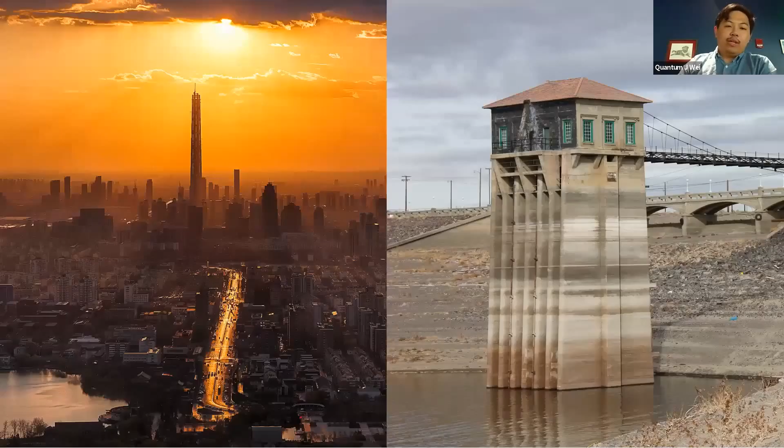But first, why do we care about desalination? Well, by 2050, it's projected that 6 billion people will face freshwater scarcity problems. This is due to 2 reasons. One, as populations grow larger and wealthier, they consume more and more water, so there's a growing demand. At the same time, due to the effects of climate change, rainfall patterns are becoming more extreme and more uncertain. So the supply is becoming more unreliable, and you can expect to see more and more dry reservoirs like this one, more and more drought.

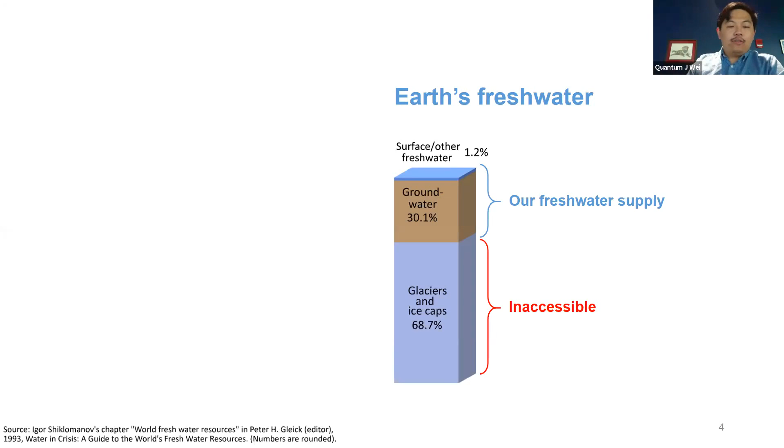This is the Earth's fresh water. Two-thirds of it is frozen in the ice caps, so it's not really accessible to us. The remaining third is our fresh water supply, and pretty much all of our drinking water comes from that third. That fresh water supply gets replenished through rainfall, the hydrological cycle. All of this fresh water compared to the Earth's water overall is very small, a little less than 3%.

As we're seeing more and more places seeing less rain, more drought, what can they do to expand their water supply? Well, the reason I think desalination is going to be more important in the future is because desalination allows us to tap into the ocean and expand our fresh water supply.

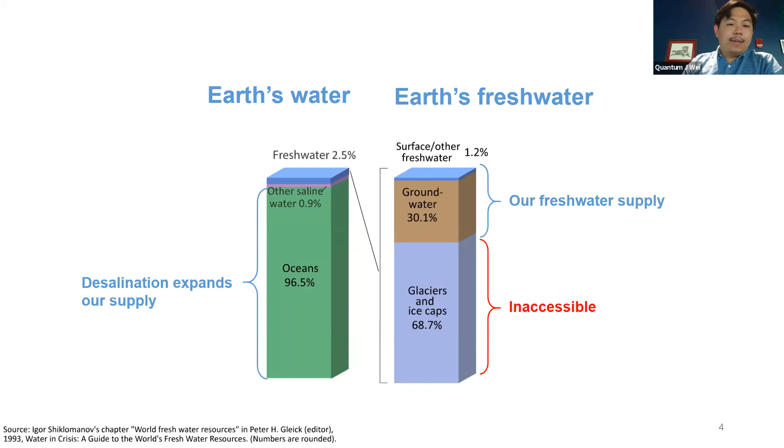I'm not saying that it's going to be the tool everywhere. It's not going to be a silver bullet, but when it doesn't rain, we can desalinate. And where it makes sense, we should use this tool.

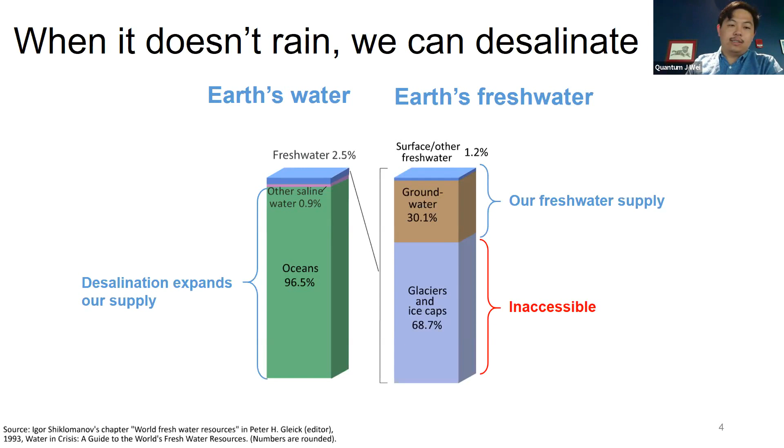The state-of-the-art method for desalination is reverse osmosis, or RO. 50 years ago, the dominant methods were thermal desalination technologies, basically evaporating water. But reverse osmosis has gotten a lot better and a lot cheaper over the decades, and is now the dominant desalination technology.

So what are researchers looking at to improve this technology? Well, the first is energy consumption. If you look at seawater RO, it requires really high pressures. It varies by plant, but roughly speaking, a third of the cost of seawater RO is attributed to the energy cost.

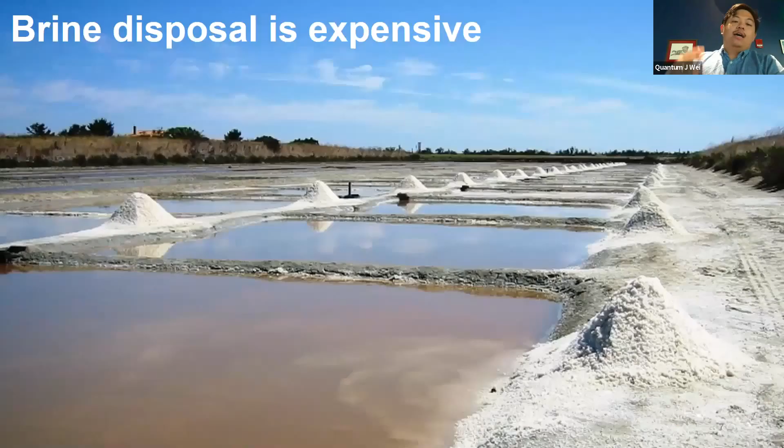In brackish water desalination, brine disposal is the main concern. These desalination plants are usually located inland, far away from the coast. They're desalinating brackish groundwater, and those plants produce a brine that they have to figure out some way to manage. One way you can do it is with evaporation ponds.

So dig a big hole, dump that brine in, and wait for it to evaporate. Another method is deep injection wells — dig a really deep hole and put that water into the ground.

These methods are really expensive compared to reverse osmosis. So if you were able to, people would much prefer to run RO at higher recovery and recover more water, produce less brine, and avoid digging these evaporation ponds.

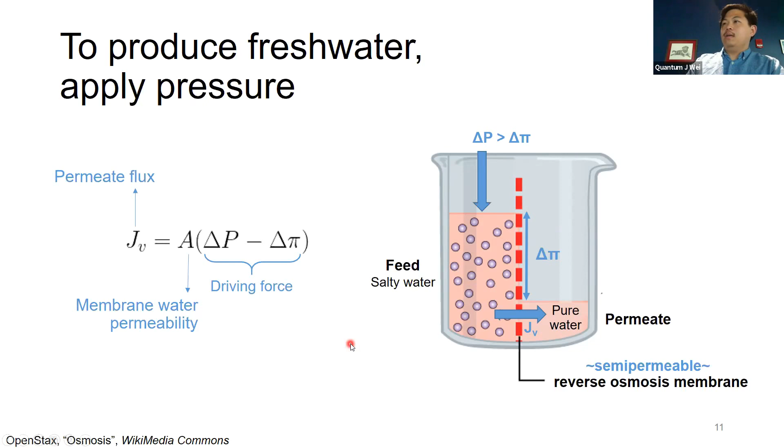Now, as we move along the membrane module, delta P is greater than delta pi, so permeate is always being produced and is permeating through that membrane. As that happens, the feed gradually gets more and more concentrated, and we end up with a brine solution that continuously flows out of the system.

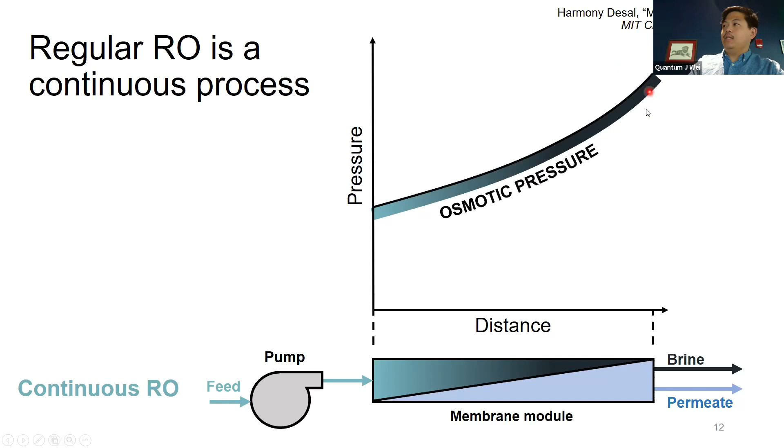You can see here the osmotic pressure starts out low as that feed enters. As the feed gets more and more concentrated, the osmotic pressure rises. And the way these things work, the pressure that this pump applies, that continuous RO pressure, must be greater than the osmotic pressure at the end of the system. So that's what it looks like there.

And the problem here is continuous RO wastes a lot of energy because of this configuration. You can see the difference between the pressure and the osmotic pressure is very small at the end of the system, but at the front of the system it's very large. The system's over-pressurized, so it's actually wasting a lot of energy that could be used more efficiently.

So that's the whole idea behind batch RO, to try to recover some of this wasted energy. And the way we do that is we don't mess around with the membranes. We're not material scientists, but we're really process engineers, so we design the process. What we do is we turn this process from a continuous one into a batch process.

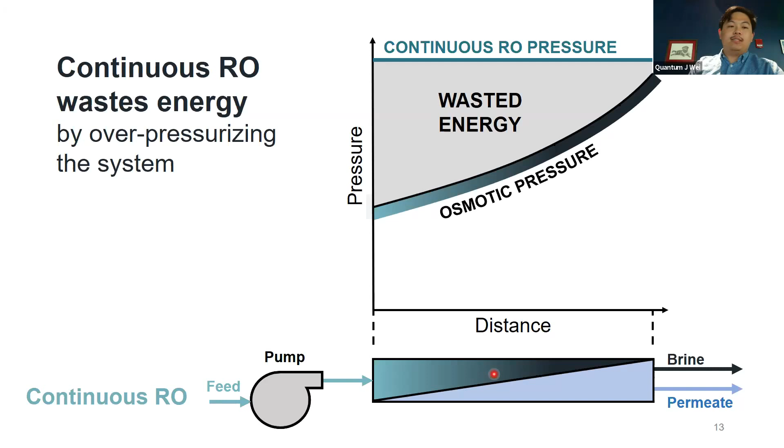This is what it looks like here. Instead of having water flow continuously in and continuously out, we're taking a fixed volume of water, and that brine that flows out, we actually recirculate. What that allows us, or what that changes, is the osmotic pressure is still increasing over the course of our process, but now it's increasing over time instead of across the distance of the membrane module.

Since the osmotic pressure is varying over time, with this pump, we can also vary the pressure over time, in order to track the osmotic pressure, just like that. And what this gets us is a big energy saving. In fact, batch RO is the most energy efficient RO process possible in theory.

So this idea has been around for a while, but there's been a lot more work on it recently, over the past 8 years or so.

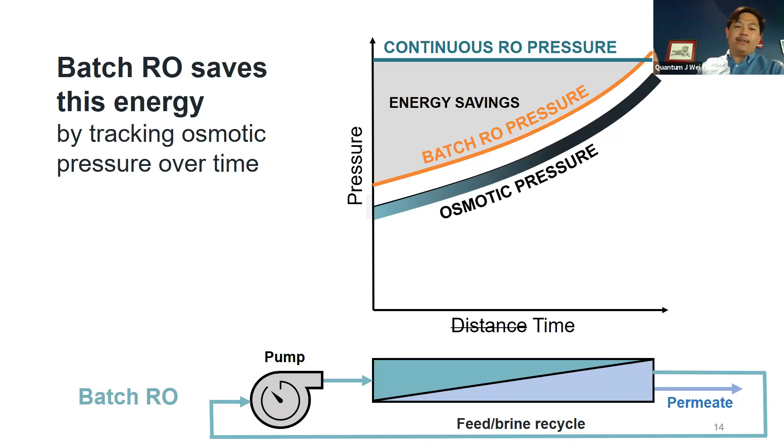The reason for that is there were lower hanging fruit before this process redesign. Improving the pumps, membranes, and energy recovery devices got you a lot of energy savings, and you didn't have to worry about reconfiguring the whole process.

But now people are looking at batch RO. First, researchers in our group and other groups wrote energy models to predict the energy consumption of batch RO. They found that batch RO is the most energy efficient RO process, more efficient than two-stage RO, more efficient than semi-batch or closed circuit RO.

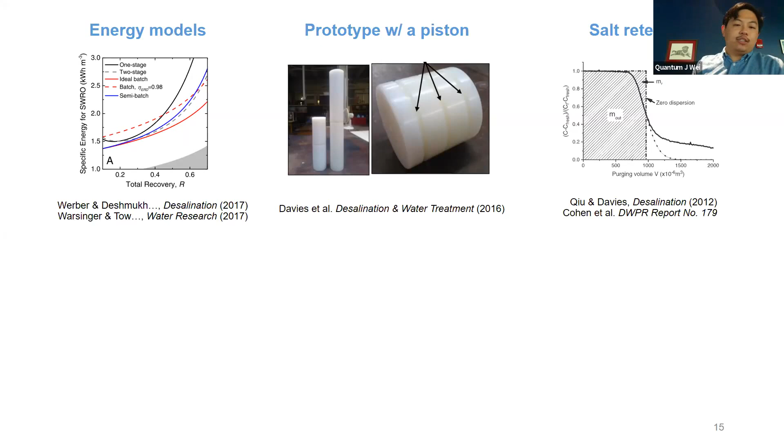This research group in the UK built the first batch RO prototype, using a piston for their design. The same group looked at salt retention in batch RO — we'll talk a lot about this later.

Jay from our group looked at the optimal design of batch RO systems, varying reset times and per pass recoveries. David, Emily, and others in our group looked at the scaling resistance in batch RO — the idea that by rapidly cycling salinity, batch RO is resistant to scaling, so we can operate at higher recoveries than regular RO.

Finally, more recently, groups have thought about new designs for batch RO. This one here is a hybrid semi-batch batch RO system that reduces the footprint of batch RO systems at high recoveries.

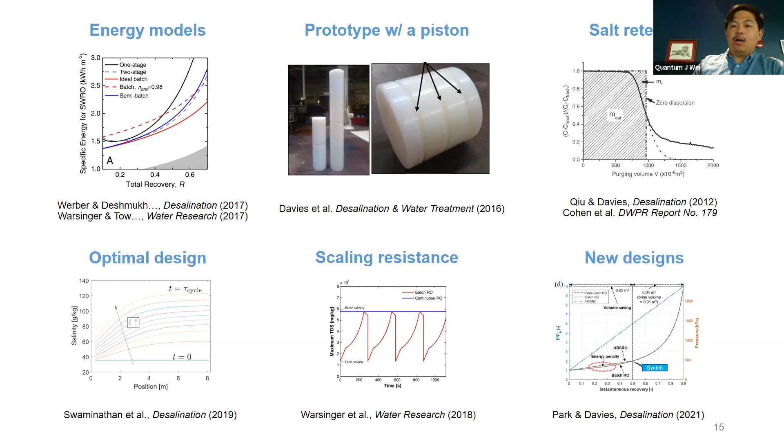So when I first started working on this four years ago, what was sort of missing was that students in our group had invented a new batch RO design. Here there is a bladder.

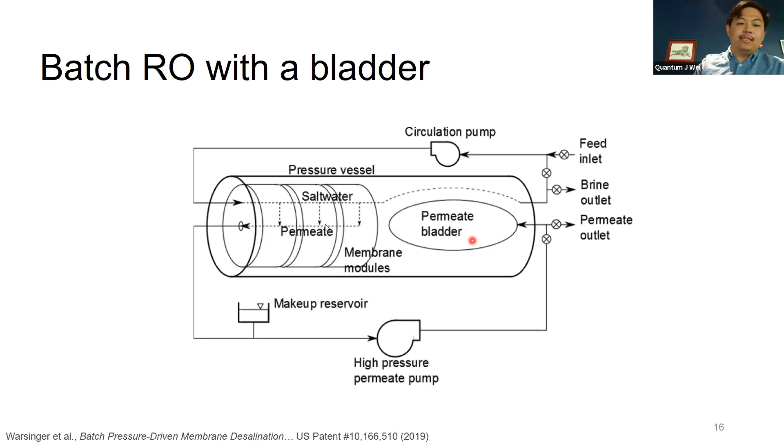That bladder basically replaces the piston we saw in the earlier slide. The thinking was that this design is more advantageous because with the bladder, it's probably easier to manufacture and there's less chance of leaking. With the piston, that piston moves back and forth during the batch RO cycle, whereas this bladder is freestanding and not touching any of the walls of the pressure vessel — maybe it's just easier not to have to deal with that at all.

So this is what we thought — to build that batch RO system with a bladder — and this is what that system looks like. You've got the bladder sitting in a pressure vessel, our RO membrane, a high pressure pump, and our circulation pump.

When we want to produce permeate water, we take a makeup fluid and pump it through that high pressure pump and into the bladder. That bladder wants to grow, but one thing to take note of is that water is incompressible.

What that means is if you're pumping water into a tank that's filled with water, the pressure is going to rapidly increase. If you continue pumping water into that full container, either the pump's going to break or the tank is going to break.

Or in our case, we have a safety pressure release valve in the form of the RO membrane. Because once the pressure in the pressure vessel exceeds the osmotic pressure of the feed fluid in the pressure vessel, permeate is going to leave through the RO membrane.

So in this manner, permeate is produced at the same rate that makeup fluid is entering our high pressure pump. Throughout, this circulation pump is circulating water around the system to keep the feed well mixed and to provide a cross flow against the RO membrane to reduce concentration polarization.

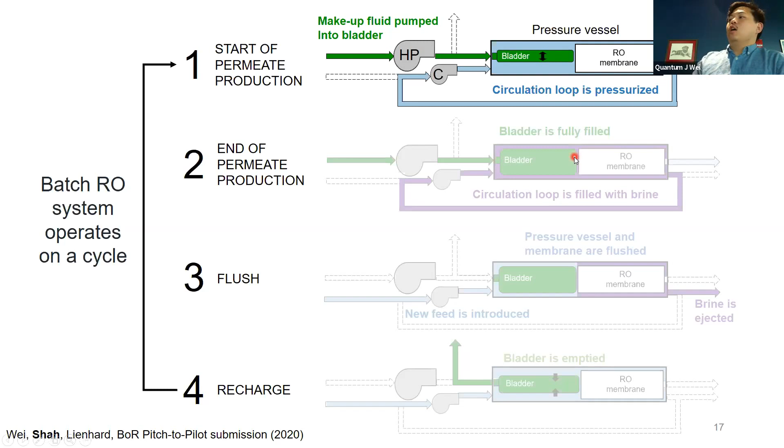We continue producing permeate water until the bladder is fully filled up. That circulation loop now has much less water, but basically all of the salt, since the salt can't pass through the RO membrane. So if we want to continue producing permeate, we can't do it like this.

What we have to do is reset the system, starting by flushing it. We open and close some valves, and the circulation pump brings in new feed and ejects the brine. We do that until all the brine has exited the system.

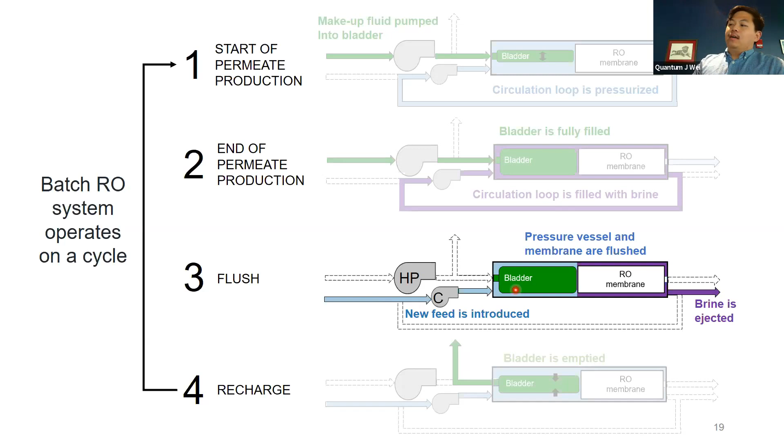Next, we need to recharge the system. We open and close some more valves. The circulation pump continues to bring in more feed, and now it's emptying the bladder. Once that bladder is completely empty and the pressure vessel is filled with feed, we can go back to the permeate production phase and do it all over again.

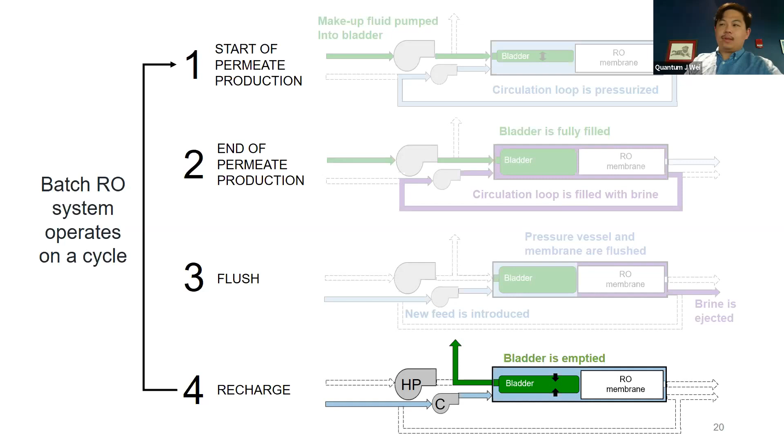Now we've got the system up and running, and really the importance of this is the first batch RO system with a bladder that has been built and operated. As far as I know, the only one.

What's important here is the bladder. This is a new component that RO systems don't currently use. So people are rightly concerned about the reliability of this bladder. This bladder is growing and shrinking throughout each cycle. Can it do that reliably for thousands, tens of thousands, hundreds of thousands of cycles? If that bladder isn't able to do that, then the design isn't going to work.

Well, our bladder is able to function. We've got it functioning for hundreds of cycles without failure. We haven't been able to do longer-term testing, but I think we've shown that this design can work and merits further exploration. The second thing we did with this prototype was validate energy models.

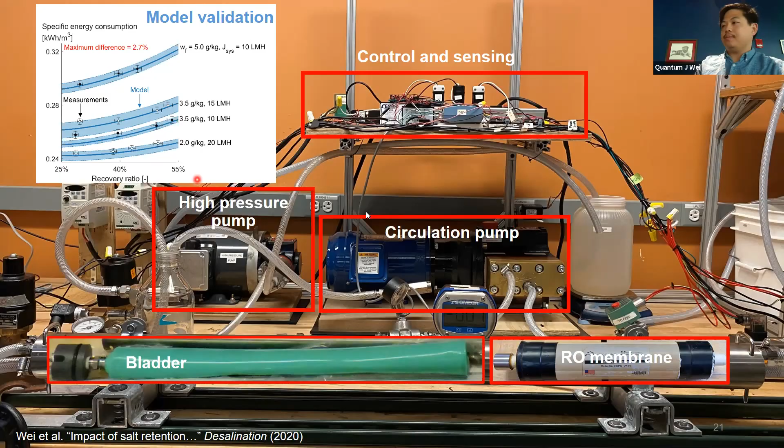So we've demonstrated batch RO, we've validated energy models, so we're thinking we've got the most energy efficient RO process, so we're good to go. But with any new technology, things don't work out the way in real life that you maybe expect on paper. Usually you'll have practical losses or parasitic losses that come up. Maybe you didn't expect them before, or maybe you just aren't able to measure how much they affect your performance without actually building and operating the prototype. So that's what we did next with the prototype: took a look at these practical losses, and after quantifying them, came back and revisited to see really how much energy batch RO is going to save.

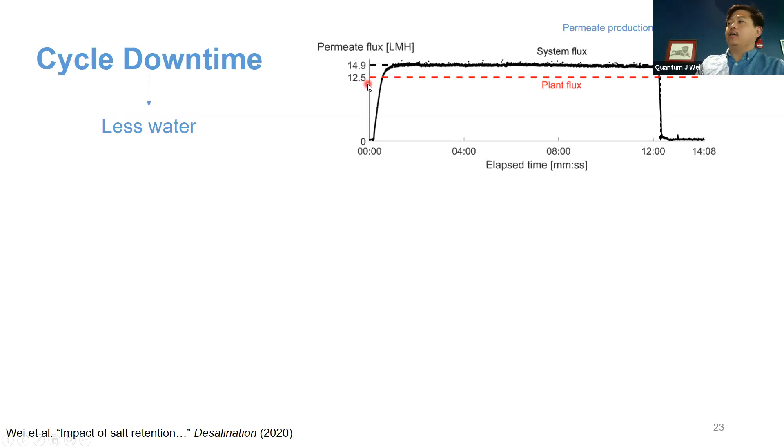The first practical loss is cycle downtime. Here we've got permeate flux. These are experimental measurements over time throughout the batch cycle. During the permeate production phase, we're producing water, but then during the flushing and the recharge phases, we're not producing water. That's the practical loss. If you take an average over the entire cycle, your flux is lower than your operating flux during the permeate production phase.

A quick word on units. Permeate flux is defined as the permeate flow rate per unit membrane area. The units are liters per hour per meter squared. The desalination industry has developed this shorthand, LMH, which basically means these units. So 15 LMH means that you're producing 15 liters per hour of fresh water per square meter of membrane area.

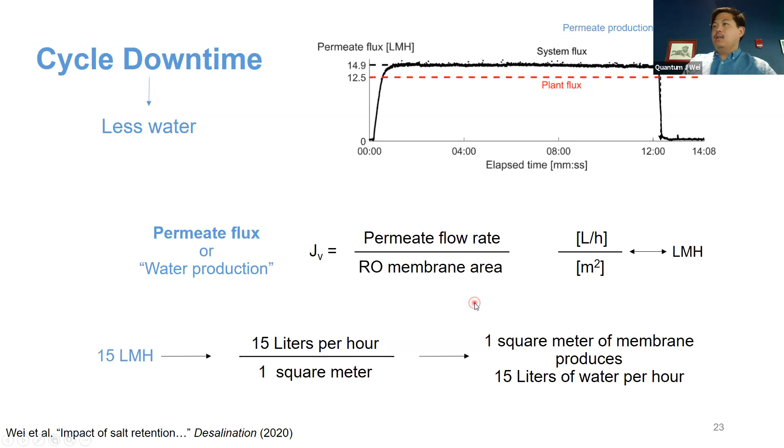Why do we care about the feed salinity? Well, this feed, 35 grams per kilogram, that's typical for seawater. That means you have 35 grams of salt per kilogram of seawater. Remember, feed salinity determines osmotic pressure, so the osmotic pressure of the feed is going to be 28 bar, or 28 atmospheres. And if you increase the feed salinity, you're going to have a higher osmotic pressure, like that brine. So if we get a saltier feed in our system, that's going to push the pressures up, and that's going to push the energy consumption up.

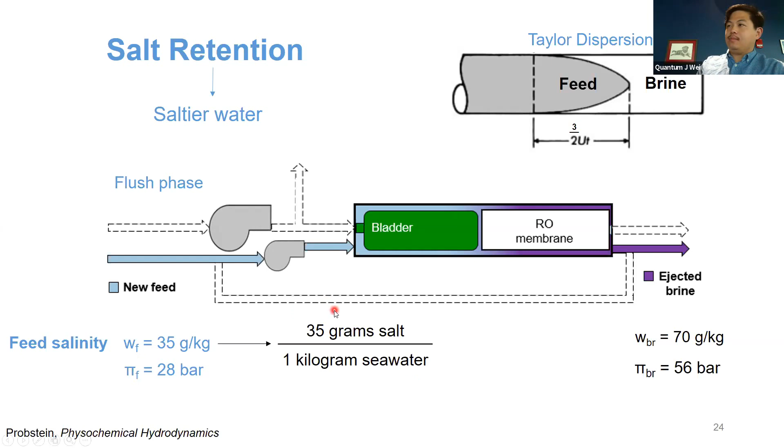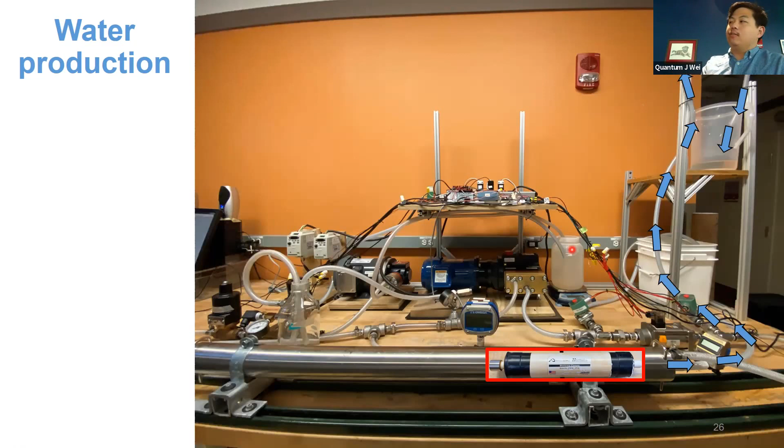Now we noticed whenever we stopped the permeate production phase and went to the flush phase, water would start going down, and it would start from the apex and start to travel down this tube. And if you let it go long enough, sometimes it would actually re-enter the pressure vessel and bring air bubbles into that membrane. So that's the reason we brought this tube all the way up there. We wanted to give the permeate more length to prevent that from happening.

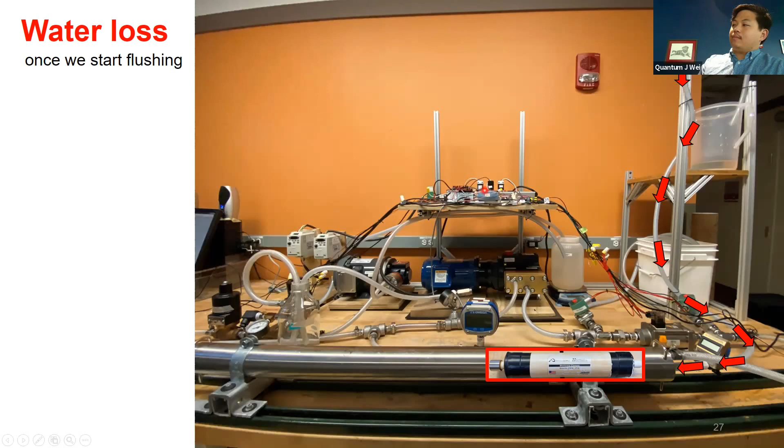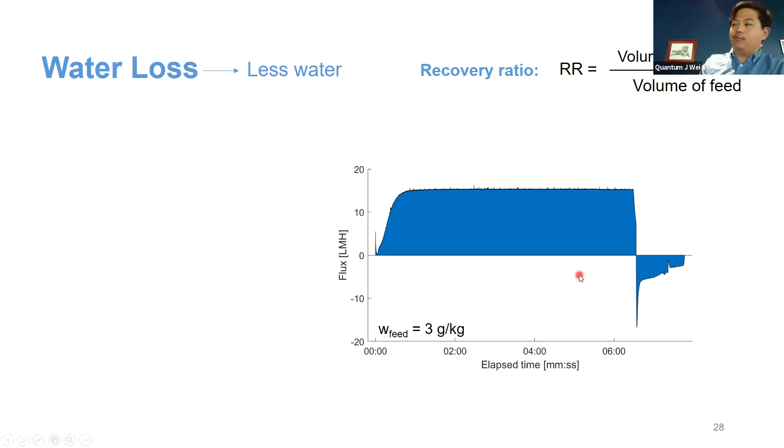The way we measured this is with two flow meters back to back, one flow meter to measure the permeate production and the other flow meter to measure the water loss. The recovery ratio during permeate production was 50%, but we lost 2% of the water during the flush and the recharge phases. So the effective recovery ratio is only 48%.

Remember, the reason this is happening is because of that egg yolk. We're releasing the pressure in that system, so the driving force flips, and we get osmosis, a natural tendency for water to travel back into a salty solution.

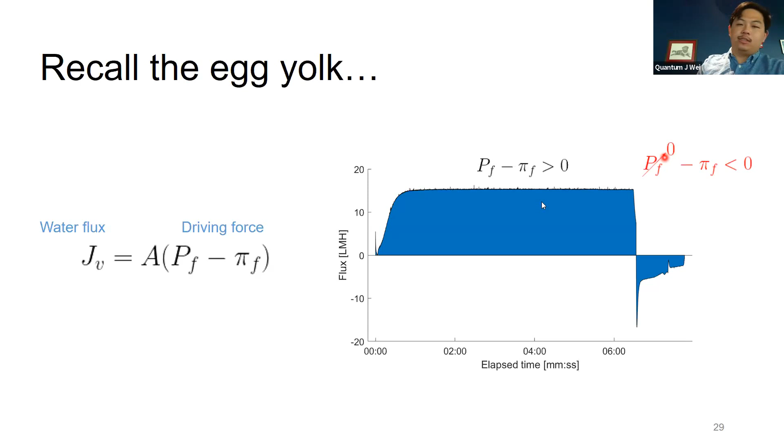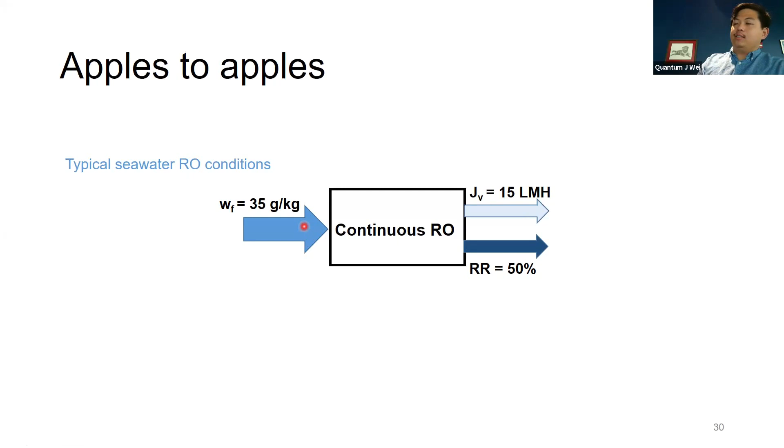So why do we care about these practical losses? When we're thinking about comparing batch RO to continuous RO, we want to make sure that we're making a fair comparison, apples to apples. So these are the typical seawater conditions of a continuous RO plant. The energy consumption is 2.2 kilowatt hours per meter cubed, so 2.2 kilowatt hours of energy per meter cubed of permeate.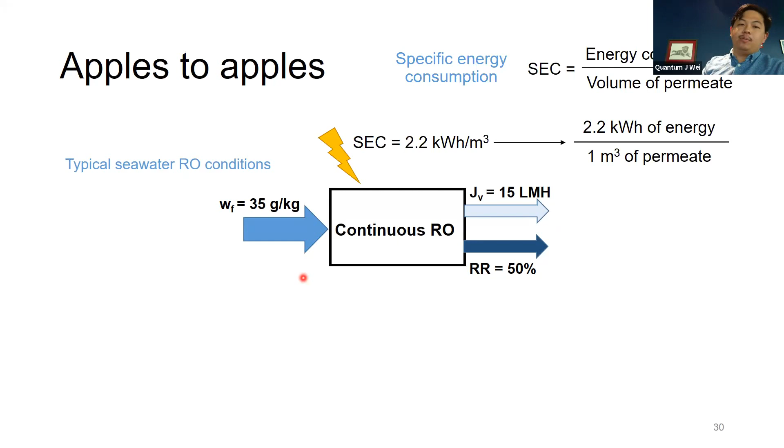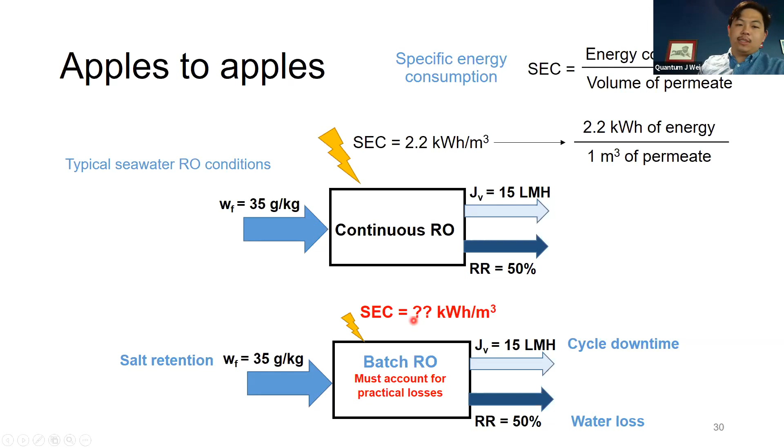If we've got a batch RO system, and we're comparing it to the continuous RO system, we want to make sure that the same water is coming into the system and we're producing the same water out. We want all of these parameters to be the same. But because of these losses, the batch RO system is going to see a different feed salinity or operate at a higher flux or a higher recovery ratio. So we need to account for these losses in order to calculate that energy consumption with our energy models and then compare it to continuous RO.

So for the cycle downtime, it's easy to calculate. It's just a proportion of the downtime to the cycle time. So the batch RO system will operate at a flux of 19 LMH in this example.

With salt retention, we know the feed salinity is going to be greater. The question is how much greater. So we took the prototype and we measured the feed salinity elevation. What we did is we ran the batch RO system for multiple cycles using the same parameters, and we measured the feed salinity between each cycle. The feed salinity started out low, maybe at 2 grams per kilogram, and with each cycle, it started to increase. But then eventually it reached a steady state. And once it reached that steady state feed salinity, we recorded that value and then moved on to the next measurement.

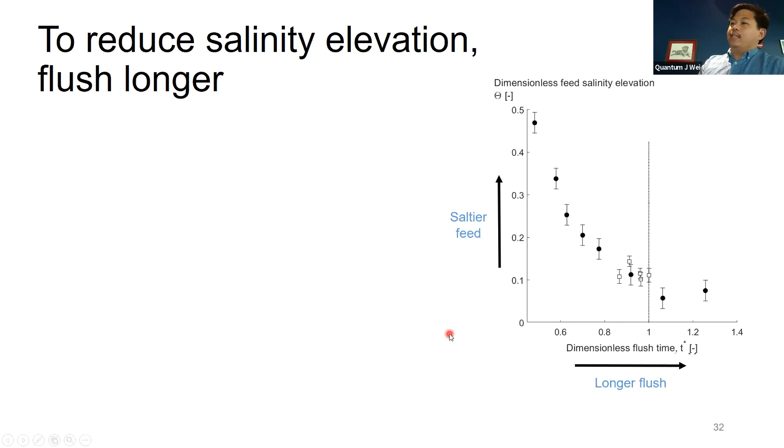What we've done here is non-dimensionalized these quantities. We took the feed salinity elevation, the quantity we're interested in, and normalized it by dividing by this quantity here, which characterizes the degree of mixing between the brine and the feed.

We do the same for the flush phase. We've got the duration of the flush phase in the numerator, normalized by the duration of the flush phase according to plug flow. Plug flow is the ideal, not realistic, case of the feed perfectly ejecting the brine.

If T star is less than 1, we're under-flushing the system, and the feed is not exiting the system. T star equal to 1 means that feed is traveling all the way out, ejecting all the brine perfectly. T star greater than 1, we're over-flushing the system, and some of that feed is actually exiting the system.

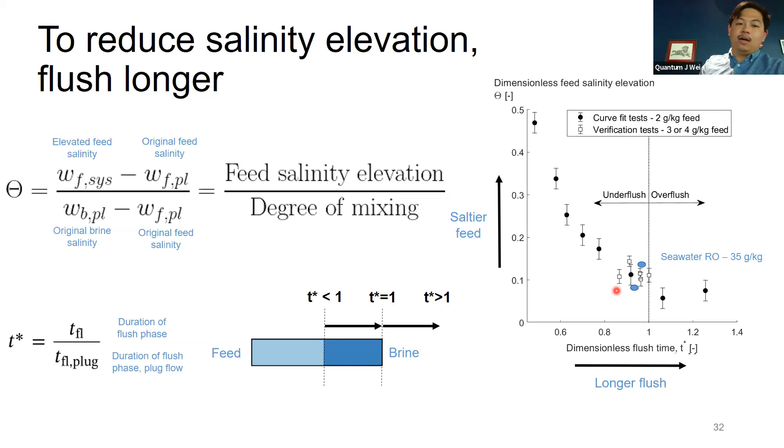The reason to non-dimensionalize these quantities is so we can plot our measurements all on the same plot regardless of feed salinity. All these black dots are tests run at 2 grams per kilogram, but the white markers run at 3 or 4 grams per kilogram feed still fit along the same curve because we've non-dimensionalized these quantities. We haven't run a seawater batch RO system yet, but I'd expect that even at 10 times greater salinity, those same results would sit in basically the same vicinity.

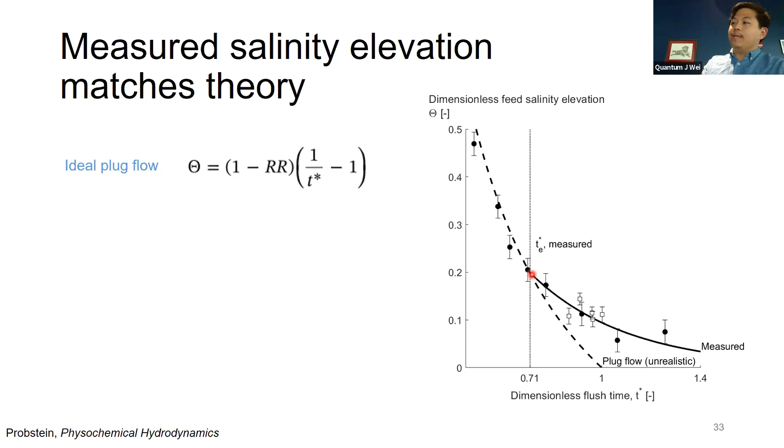The curious thing is that our measurements actually coincide with that curve at low values of T star, below a parameter I'm introducing here, T star E, E for exit. Remember, in real life what we get is Taylor dispersion, where the fluid in the middle of the channel travels faster than the fluid at the channel walls.

When T star is less than T star exit, that feed is not making it out of the system. If you just looked at what was coming into the system and what's coming out, you wouldn't know the difference between Taylor dispersion and ideal plug flow. That's why at these low values of T star these two curves coincide. So that checks out.

When T star equals T exit, the feed at the middle of the channel starts to make it out of the system, and you can see these curves start to diverge. Then for T star greater than T exit, more and more feed is coming out, and the curves diverge more and more.

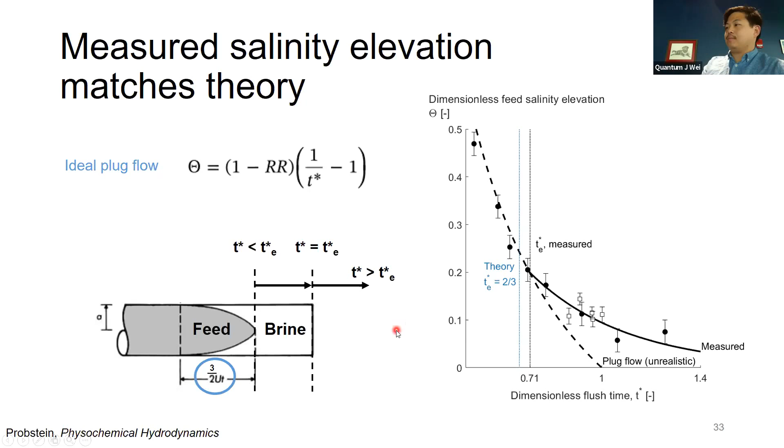We didn't optimize our system to reduce these dead legs. Future systems probably will, but even if they spend a lot of time and effort doing that and got rid of all this feed salinity elevation, they would still be stuck with the elevation due to Taylor dispersion.

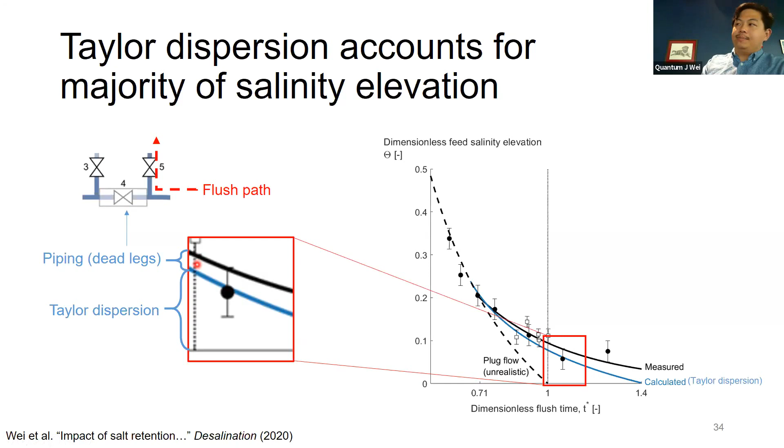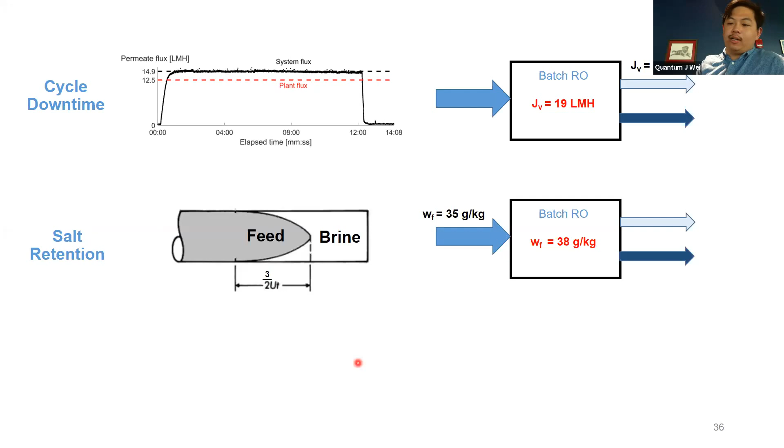For seawater, you're going to go from roughly 35 grams per kilogram to 38 grams per kilogram, a 10% increase.

Next, water loss. Remember, because you lose water during the reset phases, you're going to have to operate at a higher recovery ratio. In order to model this water loss, you can see it's clearly a transient phenomenon, so it's going to require transient two-dimensional equations.

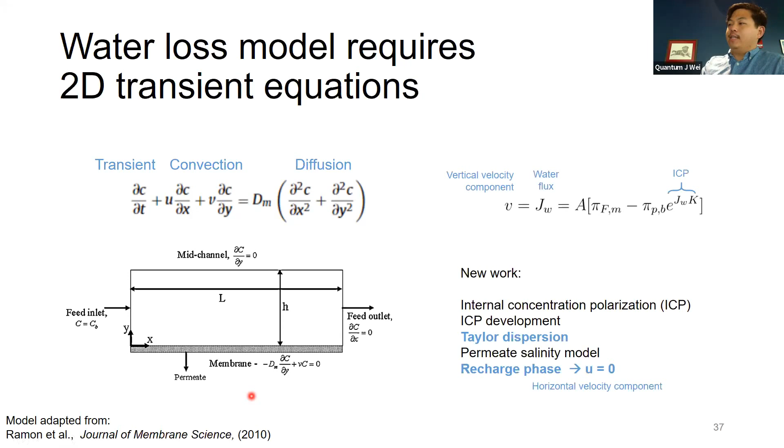So here is the equation that I solved using a finite volume solver. I adapted this model from researchers in Israel and made these additions to the model. I'm going to draw attention to the Taylor dispersion and the recharge phase, because we'll see that on the next slide.

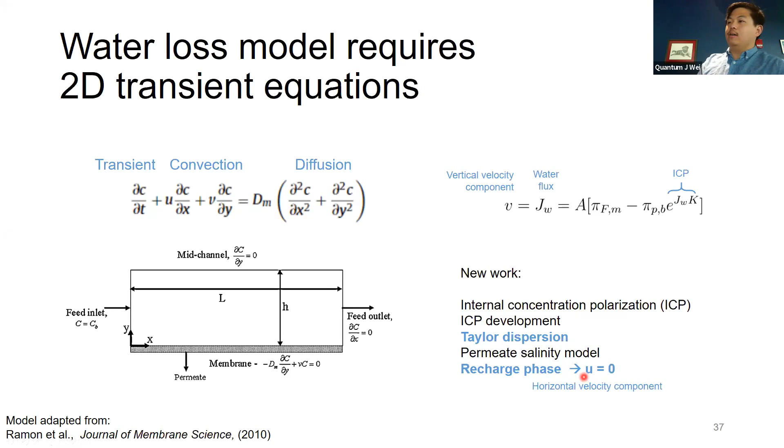During the flush phase, you've got feed entering the membrane channel here, so you've got a fluid velocity, or horizontal velocity component. During the recharge phase in our system, that velocity component disappears, so U goes to 0. We'll see that in the results here.

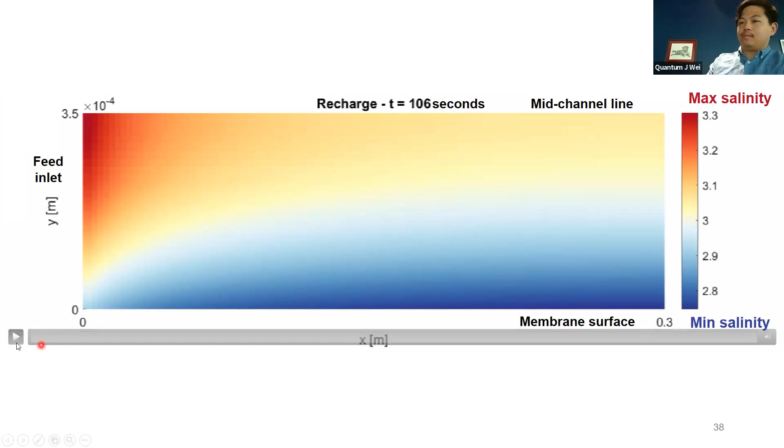I'll just play it again. So Taylor dispersion here, and then the recharge phase.

So we compared the model to experiments, and the results agree pretty well. I'm pretty proud that the model captures these three components.

During the first 20 seconds, you get a rapid rise. That's due to that dilution layer, and then also ICP. The second portion is fresh feed coming into the system, Taylor dispersion, and then all throughout the cycle the permeate salinity is increasing, which gives you this slight increase.

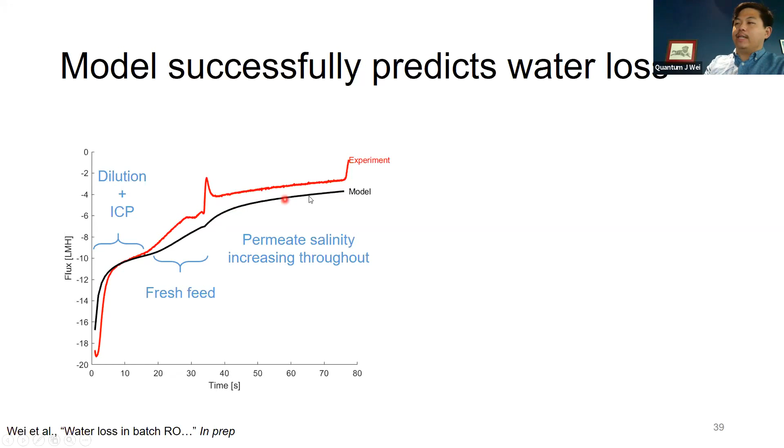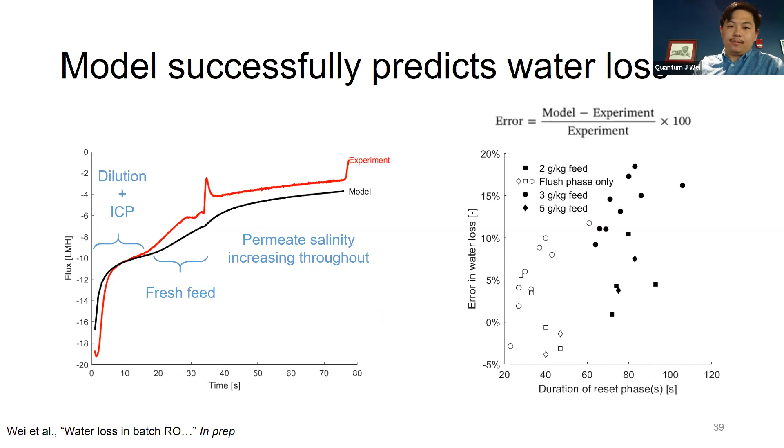So with this model, we're able to calculate what recovery ratio your batch RO system is going to have to operate at in order to achieve that 50% recovery.

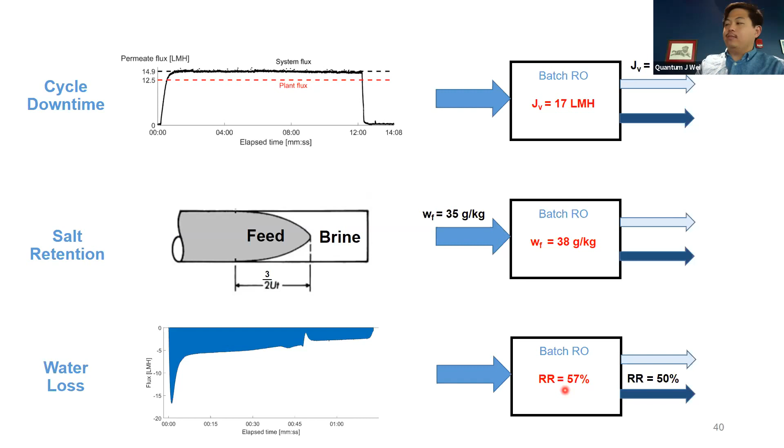So we can take all of this together and now make a revised estimate of how much energy batch RO is going to save. And here you can see the energy savings going down from originally 22% without any of these losses, down to 7%, mostly due to salt retention and water loss.

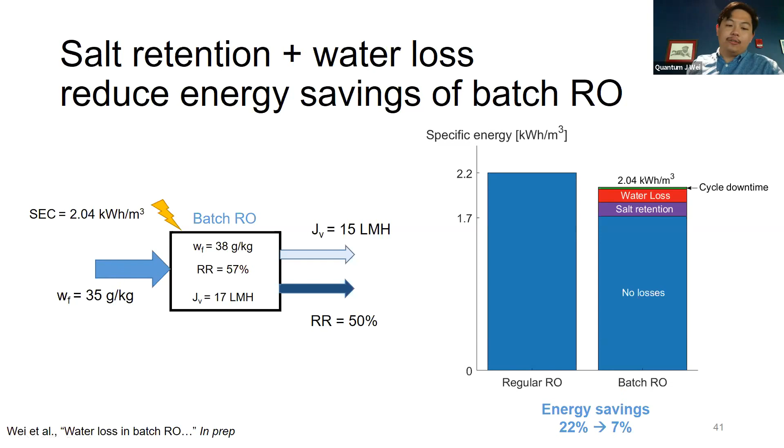Now, salt retention I don't think you can really get around, but water loss is something that we can maybe design around. So that's the next thing we'll be talking about.

I shared these results with the group a couple months back, and then came into the lab, talked to Andrew, discussed some of the ideas I had, which were, none of them were that great. But then we came up with this improved design. So as your system has more cycle downtime, you're going to see more water loss. That makes a lot of sense.

So the natural strategy is let's decrease the cycle downtime, and then we'll have less water loss. The problem is that the membrane is the bottleneck.

So on the right here, I've just unwrapped the system to make it a little bit more simple. These membranes have a maximum feed flow rate, so you can only flush them at about 4.4 liters per second. The membrane manufacturers don't recommend you go above that, otherwise you might damage them. So this results in a cycle downtime of 10%.

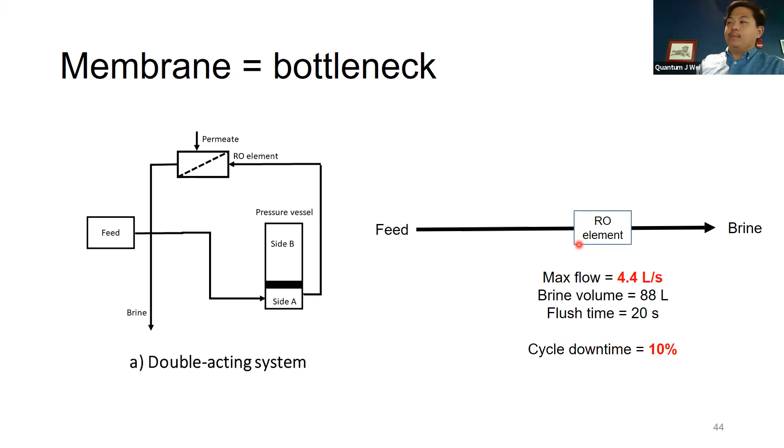The way to get around this is to branch out. Take that membrane, which is the bottleneck, and put it in one branch, and then take the rest of the system and put it in another branch. So that membrane branch, you can still only flush at that 4.4 liters per second, but now there's a much smaller volume there, so that flush time goes down to 7 seconds.

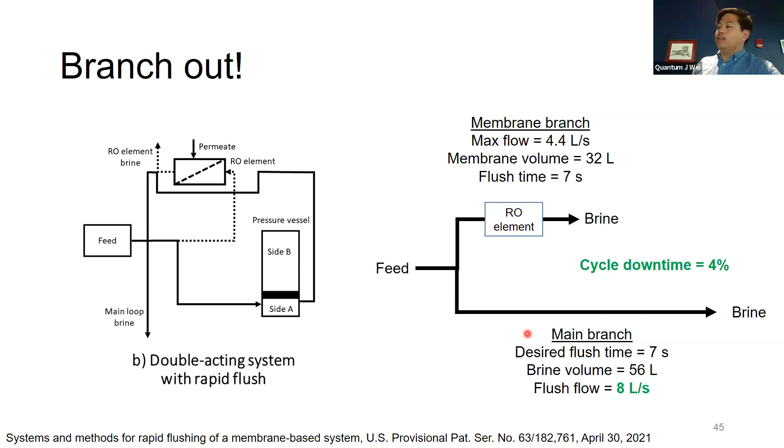Now the main branch has a bigger volume than the membrane branch, but you can flush it much faster now. Here, almost double the flow rate, basically to match the flush time of the membrane branch. So the cycle downtime goes down to 4%.

This reduces the water loss by quite a bit. So you've got the double-acting systems with dotted lines, and corresponding rapid flush systems with solid lines. We're roughly reducing the cycle downtime and the water loss by half. So here you can see this batch RO system can operate at only 53% instead of 57% to achieve that 50% recovery ratio.

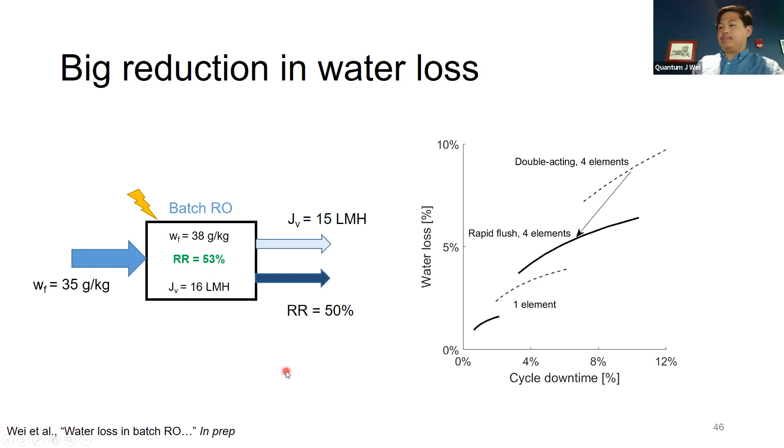So what does this do for our energy savings? Well, it nearly doubles them. So we're going from 7% to 12%.

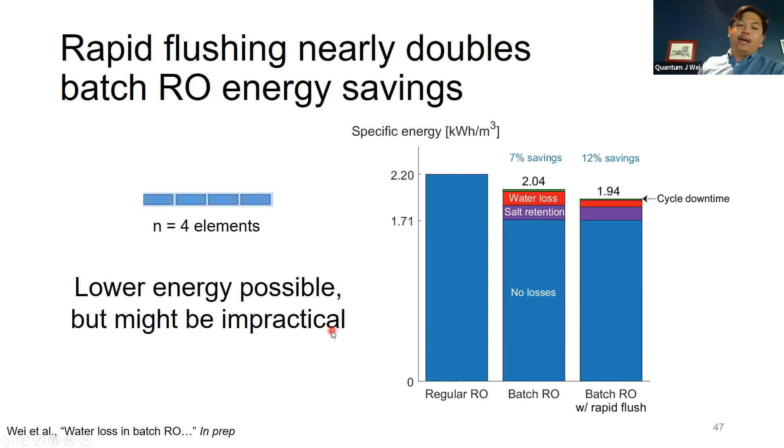We still have some water loss, and actually it is possible to get that water loss down further. But what I'm showing here, these batch RO systems have got 4 membrane elements. Now you can improve the energetic performance of these systems by going to shorter membrane trains, so maybe going to 2 elements or 1 element. But as you get systems with less and less elements, you need more and more pressure vessels to hold the same membrane area. So I think the really short systems are probably not going to be practical. Something maybe closer to 4 might be the case, but that's just my thinking.

So batch RO can save a decent amount of energy, but will it make desalination more affordable?. Finally, wrapping everything up with a techno-economic analysis. So techno means looking at the performance of our technology, and now we can do that.

We can do a good job of that now that we have a good handle on what all these practical losses are. So now we're going to take all of that and integrate it with the economics of water desalination. So first, using batch RO to consume less energy: going from 2.2 kilowatt hours per meter cubed to 2.0, a 10% energy savings.

With these systems, I'm using 6 elements in the membrane trains. Again, thinking maybe this is more practical—you've got less pressure vessels, so maybe less costly.

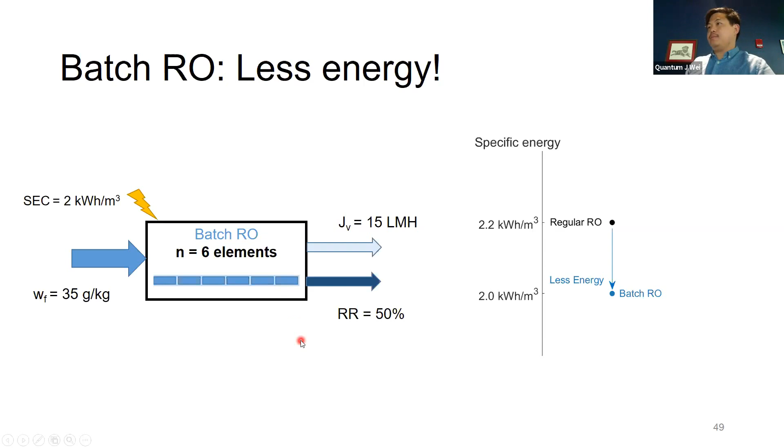The energy savings for a 100,000 cubic meter per day plant—this is a pretty big plant—at 10 cents per kilowatt hour, come out to $700,000 in energy savings per year.

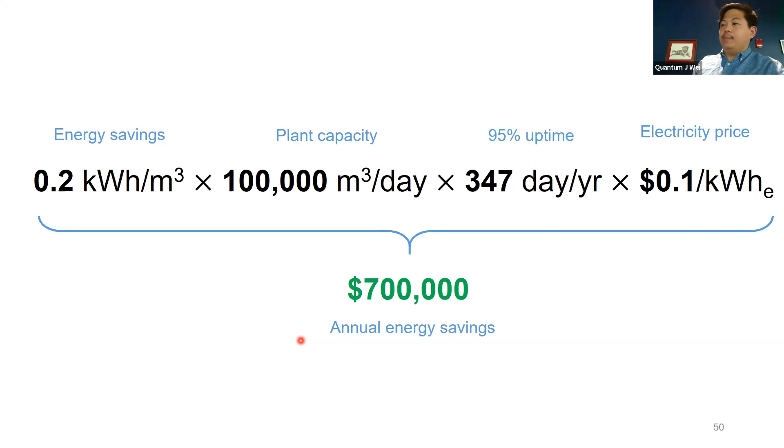So this sounds pretty good, sounds pretty great, but one thing to know is that batch RO systems are going to cost more than regular RO plants. That's because batch RO plants are going to have more piping, they're going to have valves that regular RO plants don't have, and they're going to have more pressure vessels. So you can see all this equipment costs money to make, takes up space, so that's going to increase the cost of the plant. We estimate that increase is going to be 10%, so for that 100,000 cubic meter per day plant, $120 million, tack on $12 million to implement batch RO, and suddenly that $0.7 million is not looking so big.

Now, the energy savings you get do vary with the price of electricity. So if energy is more expensive, your energy savings increase. This looks more attractive. But on the flip side, if energy is really cheap, then it's not looking so appealing after all.

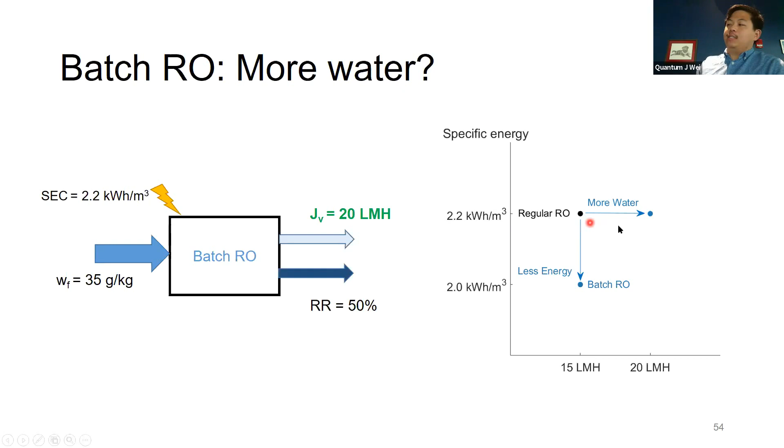But what if we use batch RO to produce more water? So instead of operating at the same flux and using less energy, what if we kept the energy consumption constant and increased the flux? Basically what we're doing here—remember that cycle downtime penalty was really small—we're taking advantage of that here and essentially operating at a higher flux intentionally, using the energy efficiency of batch RO, and actually getting something useful out of that energy bump, as opposed to salt retention and water loss, where those are just parasitic losses.

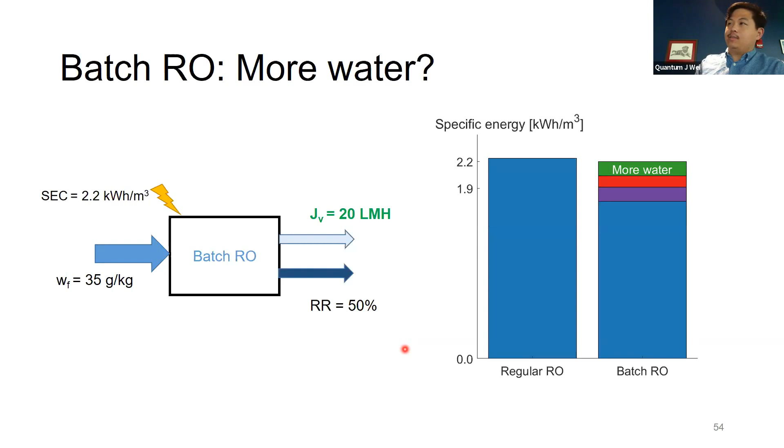But why doesn't a regular RO plant do this? Well, that has to do with the flux distribution within that membrane train.

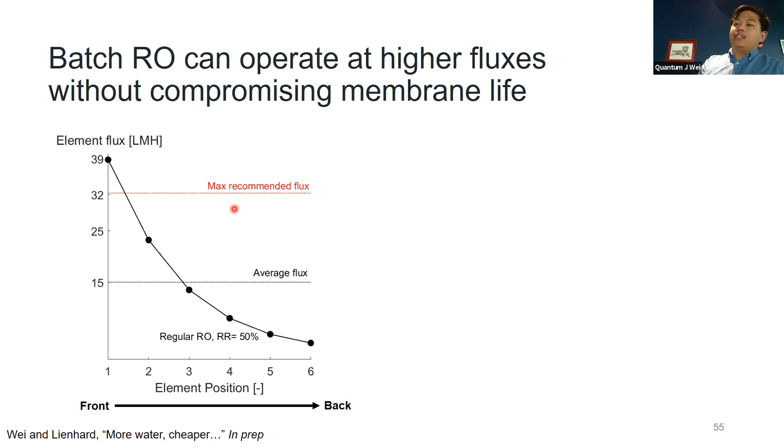So we do that here to increase the capacity of the plant. We've got the same membrane area, but increasing the flux from 15 to 20 LMH and increasing that plant capacity by 30%.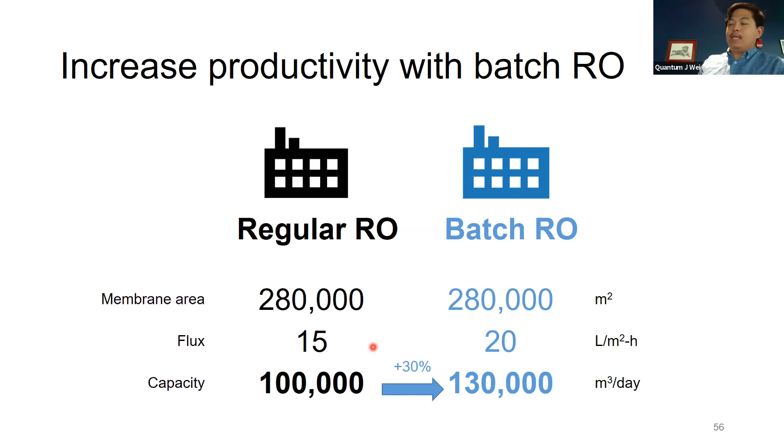So what does that mean for us? Well, first, with all of that extra water, we can sell that and get more money. So the plant gets an additional $8 million in revenue. You do have more energy costs to produce all that water, an additional $2.3 million in energy costs. The net benefit is $6 million per year. And this is 10 times greater than that $0.7 million per year we're looking at by reducing energy.

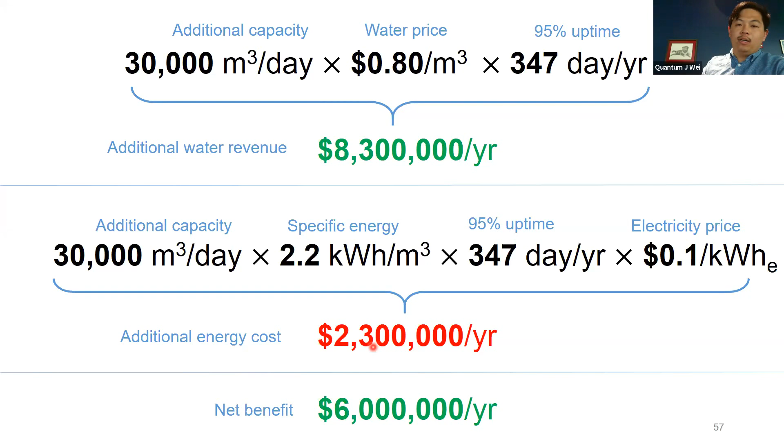However, with increasing the plant capacity, you do have to increase CapEx by a bit more. I estimate 20% to implement both batch RO and to account for your increased feed and brine flows. But still, compared to that $6 million, it's looking pretty good.

And the cool thing is this net benefit is actually independent of the electricity price. So no matter whether electricity is 40 cents per kilowatt hour or 2 cents per kilowatt hour, you're going to be gaining $6 million per year.

So can batch RO make desalination more affordable? To look at that, we need to take a look at the levelized cost of water. To calculate that, we take the total cost, so that's CapEx, OpEx, energy, labor, and divide by total water production. With the regular RO system we're looking at here, it's 80 cents per cubic meter of fresh water.

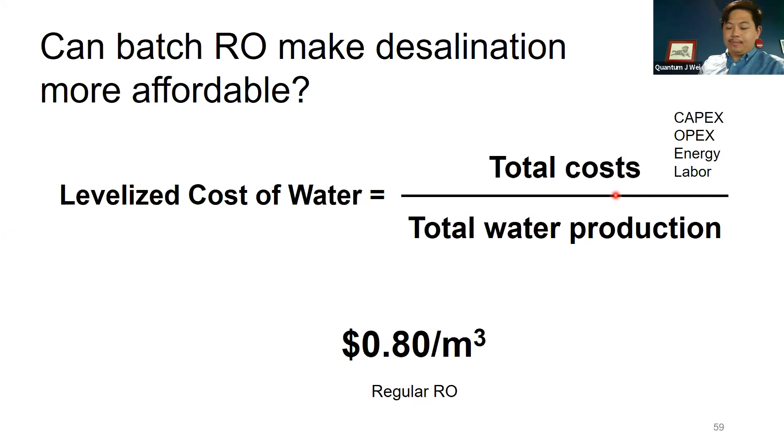When we use batch RO to reduce the energy, we reduce energy, but we actually see an increase in the cost of water. Why is that? We're looking at the numerator, and we're reducing the energy, but CapEx is going up and basically overrides that savings.

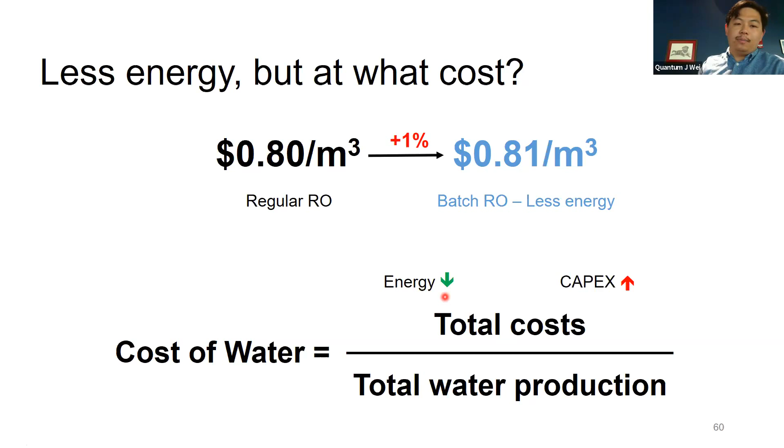By producing more water, though, we can actually produce more water and cheaper. So energy and CapEx costs are going up, so the numerator is increasing, but the denominator, that total water production, is increasing at a greater proportion. So the overall cost of water is going down, here by 5 cents or 6%.

That might not sound like a lot, but cost of water is the main metric that matters when it comes down to it, you have hundreds of millions of dollars in contracts being decided by the cost of water. If you can shave off a couple cents here or there, that is a really big deal.

So, almost there. First, I'm going to lay out the major accomplishments of my thesis. When we first started, only one batch RO prototype system had been built.

I demonstrated the first batch RO system with a bladder. This work shows that the bladder design works.

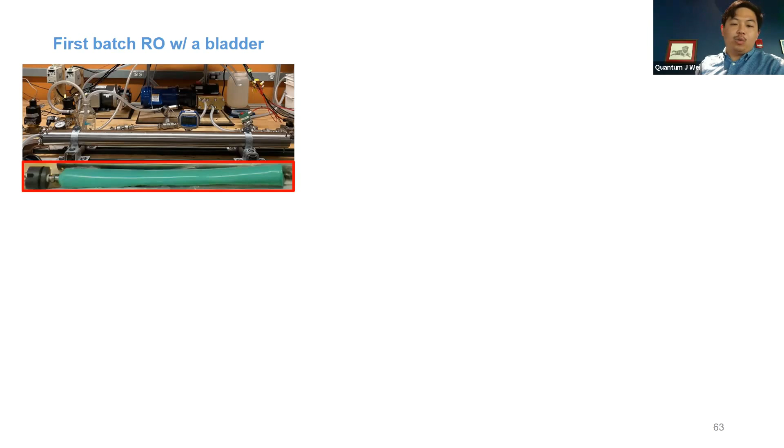Next, I used experimental measurements from the prototype to validate, for the first time, energy models of batch RO energy.

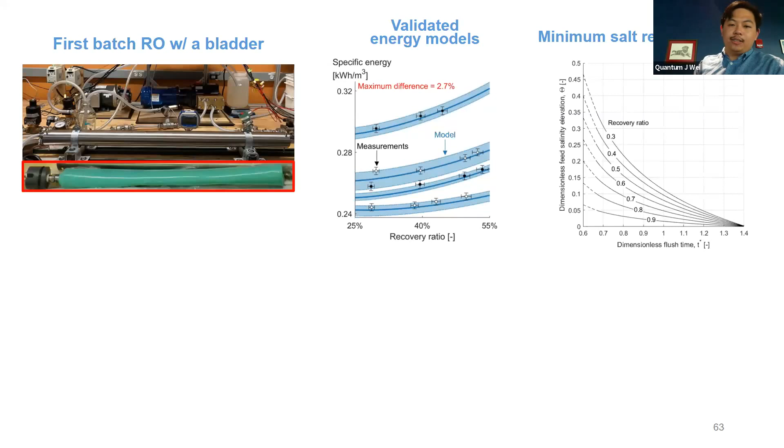I quantified the minimum salt retention penalty for any batch RO system. This is important because, as far as I can tell, there's no practical way to avoid this penalty, so it must be properly accounted for.

I developed the first model for water loss in batch RO and performed the first full accounting of all 3 practical losses. The combined effects of salt retention and water loss are pretty bad in seawater RO, but if you branch out, you can rapidly flush the system and cut water loss in about half.

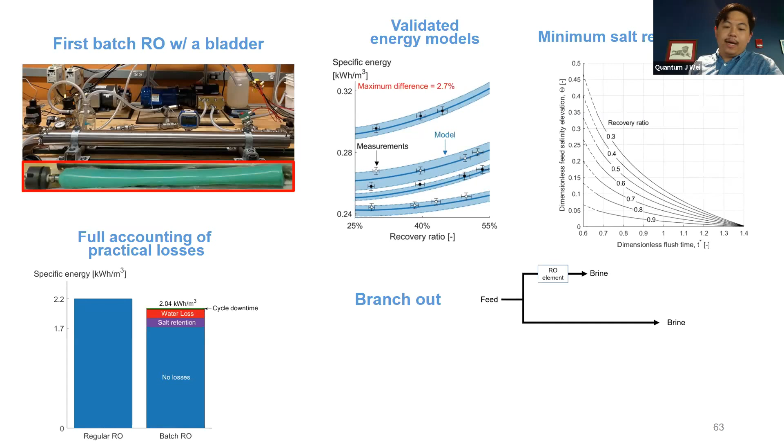I thought that batch RO would be useful for reducing energy, but have now realized that it's more valuable to use its energy efficiency to produce more water, cheaper.

Quick aside, I'd recommend any graduate student try to go to a conference early on. I've learned so much from going to these conferences and talking to people, stuff I wouldn't learn in the lab. It definitely influences my research. And you also don't really understand your research until you've presented it to others, as I've discovered over the past week or so. Plus, conferences are a lot of fun.

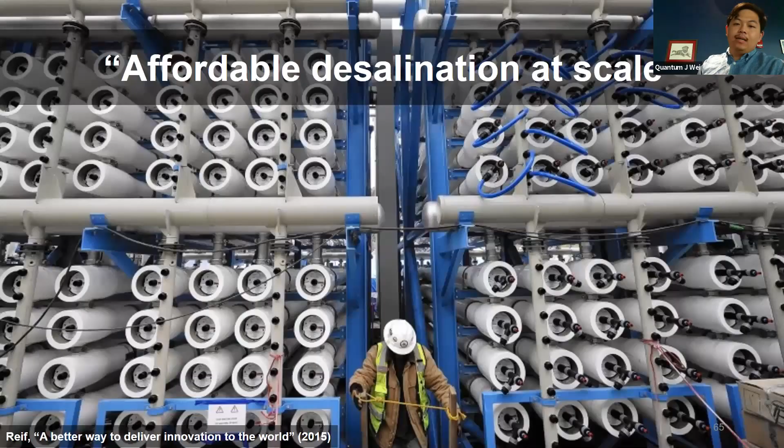But back to the original question: can batch RO make desalination more affordable and sustainable? As I've shown you or argued today, batch RO can make desalination more affordable.

Until just last week, I was stuck on this idea of batch RO being more sustainable because of its energy efficiency, and I was trying really hard to find a way to make it work. But I think for a while now, I've known what I'm only saying now: electricity is getting cheaper and cheaper, and hopefully by 2050 we can decarbonize the grid. So I think the value of batch RO is not in reducing energy consumption, but I still think batch RO can make desalination more affordable, more sustainable, by reducing the carbon footprint of the plant itself, basically getting the most out of all the equipment. So we'll see.

That concludes the technical part of the program. I've got a bit of an afterword, if you'll bear with me.

Working on a desalination startup, people often ask me why water, and I never had a great answer. It took me a long time to realize one of the reasons why.